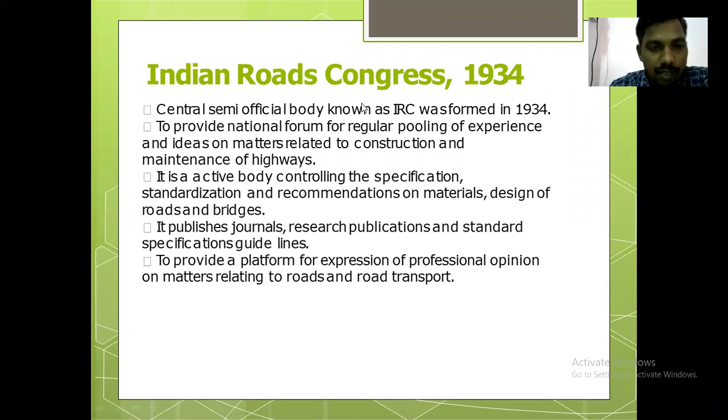IRC publishes various journals, research publications, standard specifications, and guidelines, and it also provides a platform for expression of professional opinion on matters related to roads and road transport. As per the IRC classification, there are national highways, state highways, major district roads, other district roads, and village roads. So 5 types of roads are there under the IRC classification.

Highways are classified depending upon different aspects, maybe depending upon the weather conditions: all weather roads or fair weather roads. Then depending on the type of carriageway we are going to form: paved roads, that is the WBM, water bound macadam,

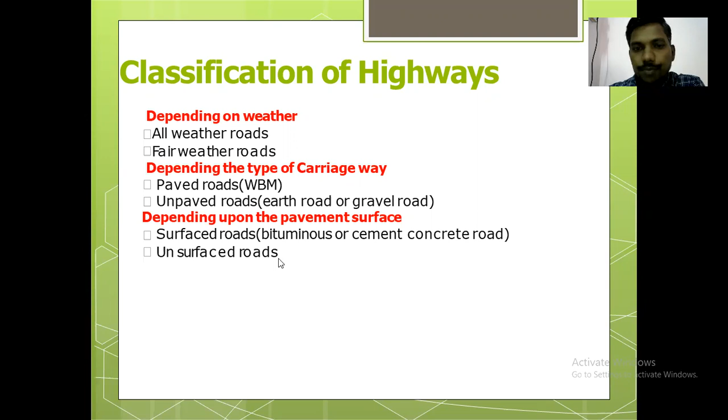Depending upon the pavement surface, whether it is surfaced roads or unsurfaced roads. Surfaced roads may be bituminous or cement concrete roads, meaning what type of material we use for the wearing course, the top course. Also based on traffic volume there are heavy, medium, and light traffic roads.

Based on load or tonnage, meaning what type of vehicular traffic will be there, roads are also classified. And below, the IRC classifications are listed: national highways, state highways, major district road, other district road, and village road. So we will see them one by one.

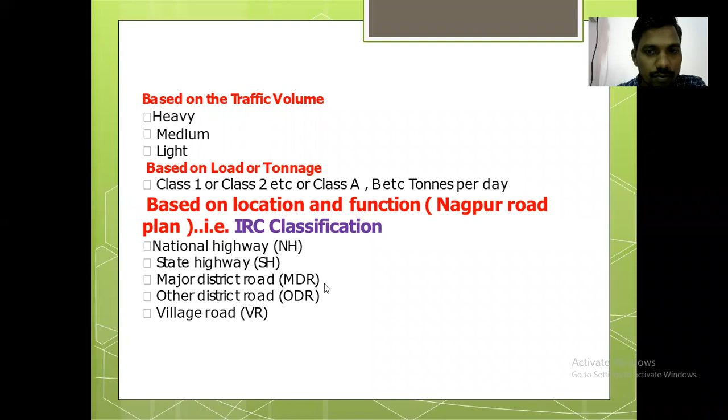These classifications are very important for MCQ or objective examinations. They will ask national highways are connecting from which point to which point, and similarly for state highways, village roads, and other district roads, as well as the roadland width, carriageway width, and roadway width. So concentrate on these points. Under the IRC classification, the first type of road is the national highways.

In short, we can say NH also. National highways are the main highways running through the length and breadth of India, connecting major parts, foreign highways, capitals of large states, and large industrial and tourist centers, including roads required for strategic movement for the defense of India. Such type of road is nothing but the national highways. For that purpose, we go for the construction of national highways, as well as for the strategic movements of the defense.

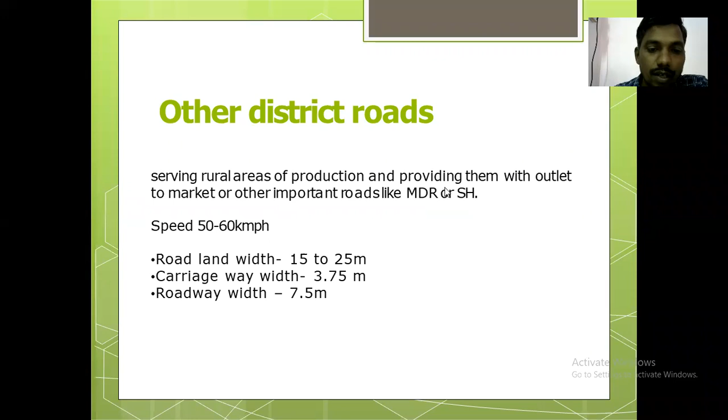Okay, then after that, major district road.

Okay, another thing I want to tell you is whatever width of the vehicle is there. Maximum width of the vehicle in India is kept as 2.5 meters, not more than that.

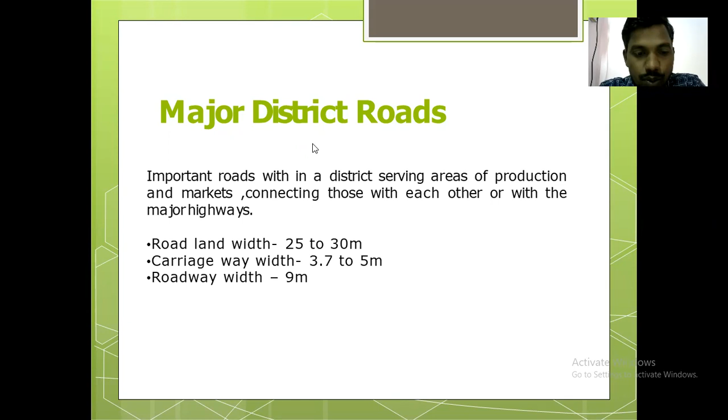In major district road we can go for 2 lanes also. Roadway width is 9 meters.

State highways connect district headquarters to important cities as well as national highways, and capitals of the states also. Generally, roadland width is provided in between 30 meter to 60 meter, carriageway width 7.5 meter, and roadway width is 12 meter.

National highways are generally used for connecting capitals of large states, large industrial areas, tourist places, as well as foreign highways. To connect them we go for construction of national highways. Here roadland width is kept in between 30 meter to 60 meter, carriageway width is kept 7.5 meter, and roadway width is kept 12 meter.

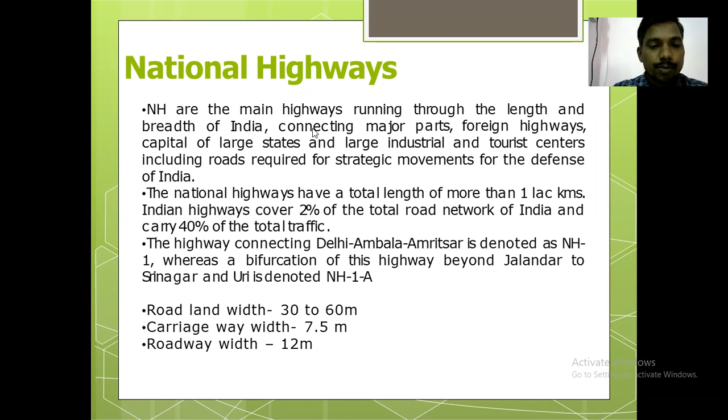Okay, so this was about the IRC classification. After that we will go for discussion of various terms in a road.

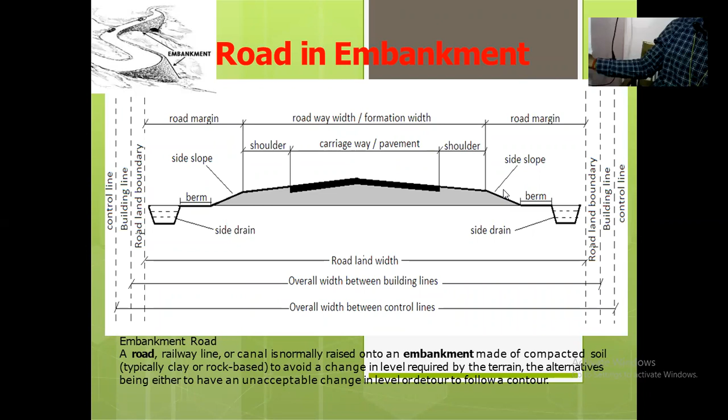Okay, after providing the slope, you can see here side drain. This is the side drain. This type of structure is there. Okay, carriageway, shoulder, slope, berm, side drain. If you understand, this kind of structure will be there at both the sides.

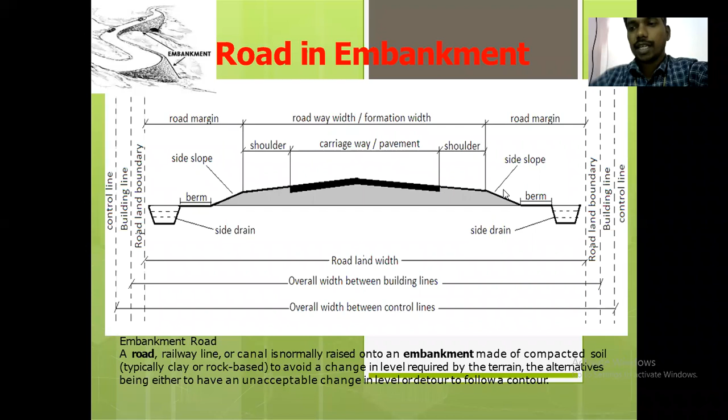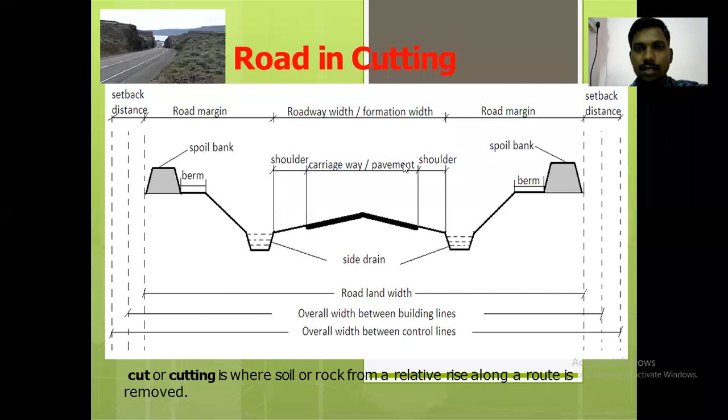Okay, and if we see road in cutting, then in that case carriageway, shoulder, then here you can see drain. Okay, side drain, this is the side drain. Here you can see side drain, then after that side slope and berm. Okay, this is the berm, and then after that berm, spoil bank is there. Okay, so you have to keep in your mind these things, one after other.

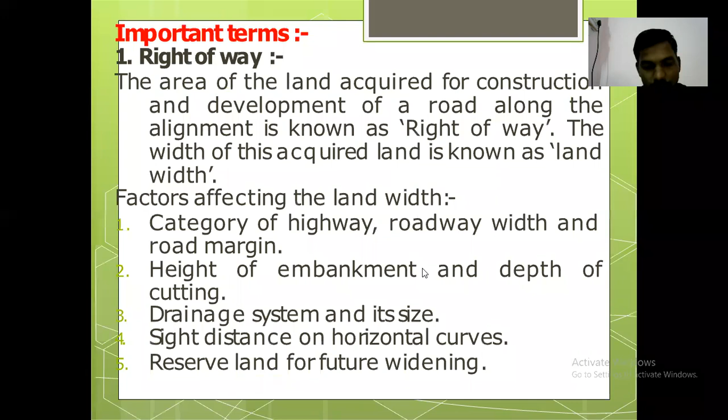So here, after right of way, we are going to discuss about the roadway width. Here whatever roadway width is there, that roadway width is nothing but the total land width of the road. It contains carriageway plus shoulders at either side. Okay, that is nothing but the roadway width. And here, according to the classification of the road, single lane and two lane, some widths are recommended by the IRC.

Here, if we have national highways and state highways, for single lane it is kept as 12 meter. If we have two lanes, then also it is kept as 12 meter. You can see here, in plain areas or rolling areas. And in mountainous areas or steep areas, it is kept as 6.25 meter for single lane, and for two lane it is kept as 8.80 meter.

Okay. Then for major district roads, for single lane or two lanes, it is kept as 9 meter. Roadway width is kept as 9 meter, and in a mountainous area it is kept as 4.75 meter. Then for other district roads, for single lane, it is kept as 7.5 meter in plain and rolling areas, and in a mountainous area it is kept as 4.75 meter.